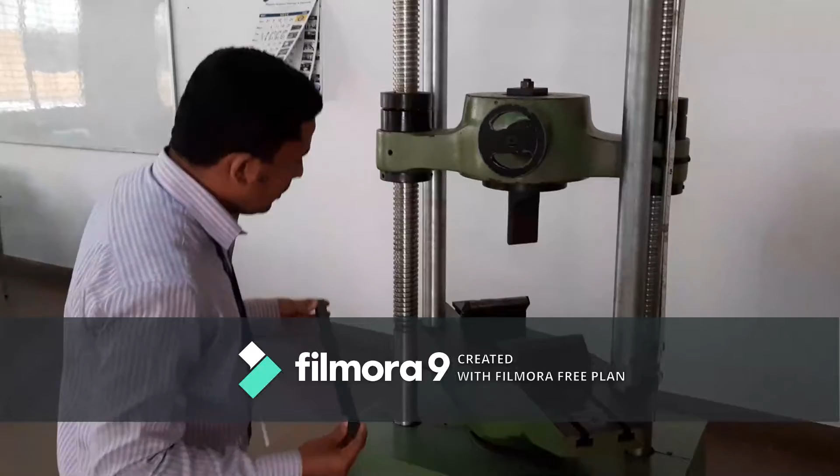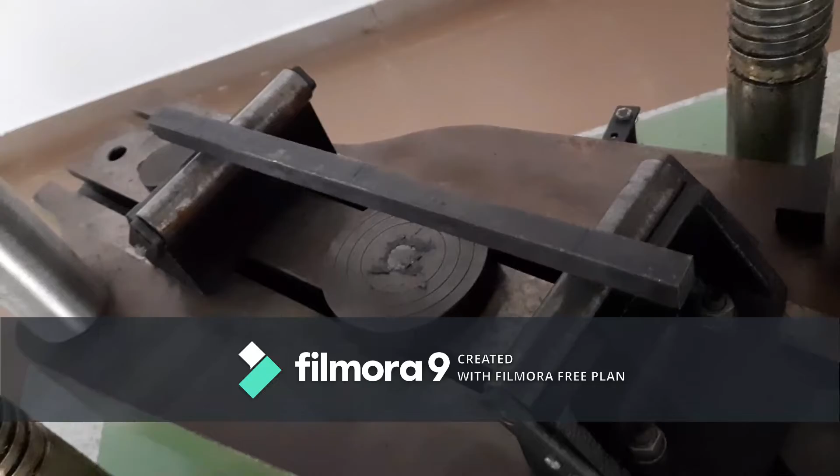Now we can copy those readings. Gauge length 300, and B is 20, D is also 20. Now let us start the experiment. Now we will keep the specimen on the two roller supports. We have two roller supports, and these extreme marks should be exactly on the rollers. Just make sure that it is exactly on the roller, and keep it exactly at the center.

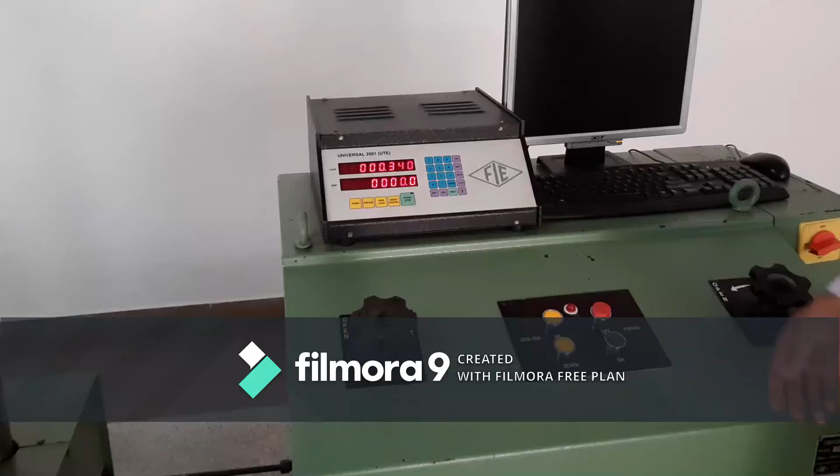Now after placing the specimen, you need to change the setup of the attachment for the bending. So this is the bending attachment for the cross head. You need to change this attachment and add this attachment for the bending. Next, before starting the experiment, you need to remove the dead weights. We have explained that in the previous experiments, so you can do the same procedure to remove the dead weights.

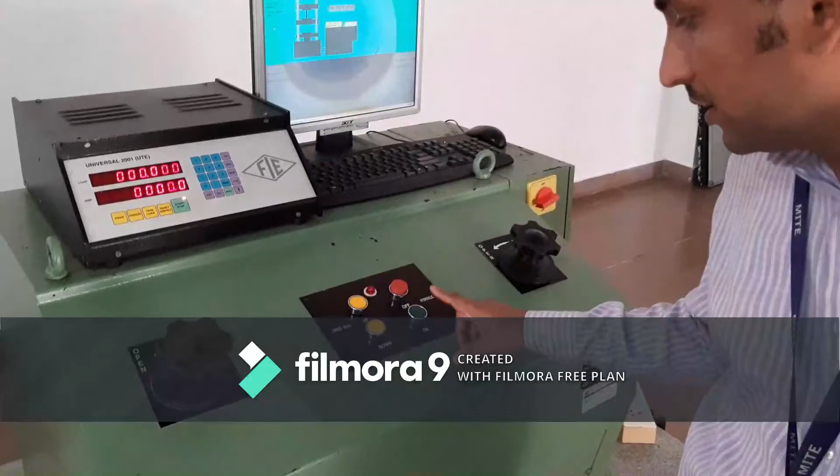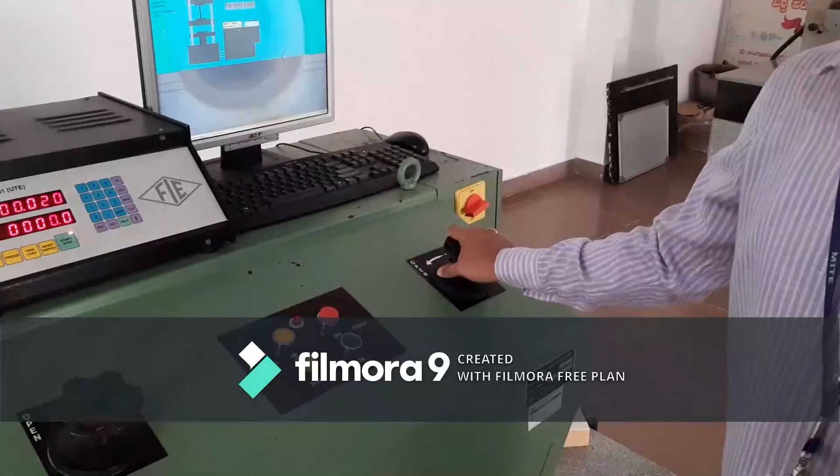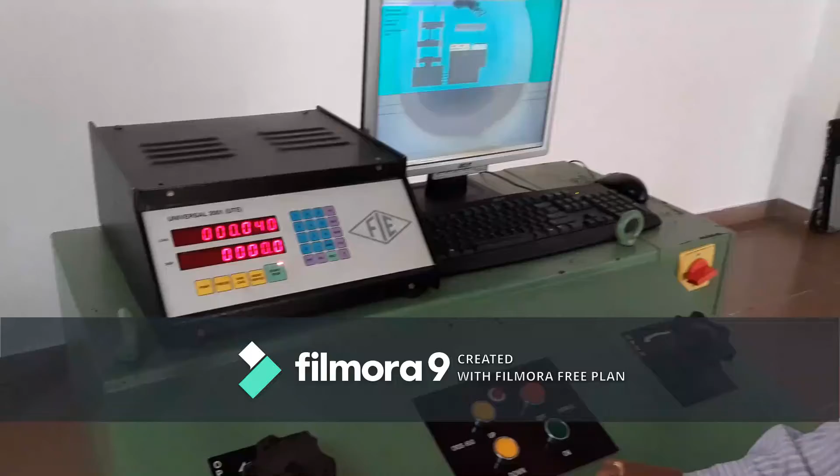Now you can move the cross head near to the specimen by using the up and down button. After moving it to the specimen, you can start applying the load by switching on the hydraulic button. Right now it is on, and slowly open this hydraulic knob to apply the load. You need to take a reading for every 0.5 kilonewton load, the displacement at 0.5 kilonewton, 1 kilonewton, 1.5 kilonewton, 2 kilonewton, like that for every 0.5 interval.

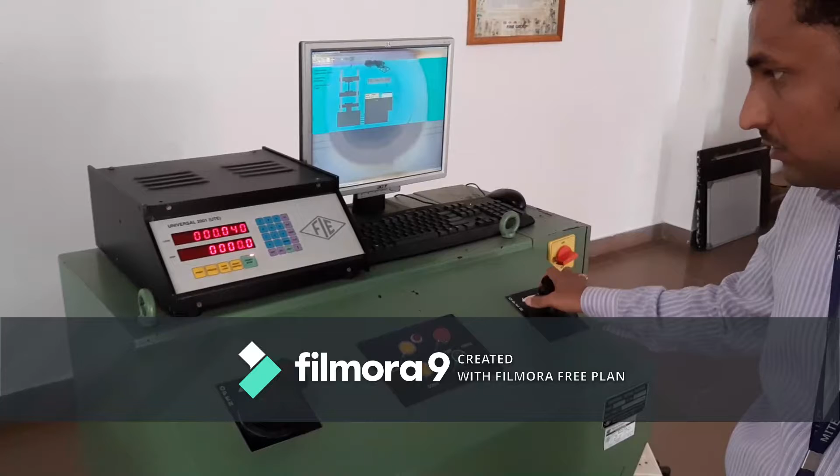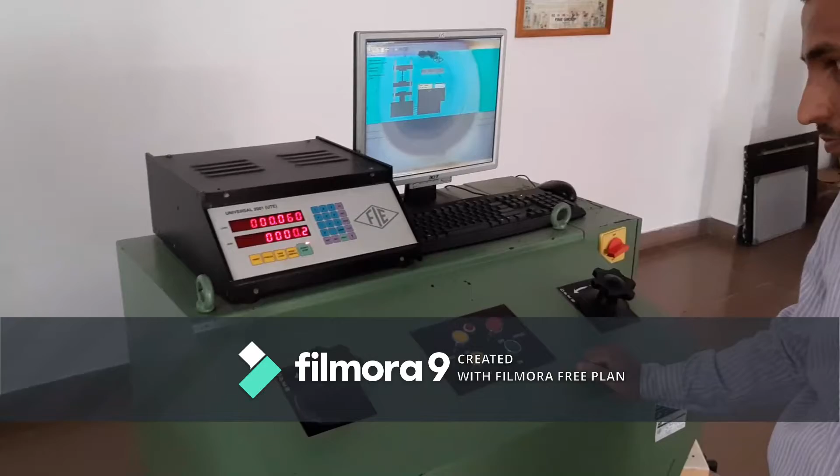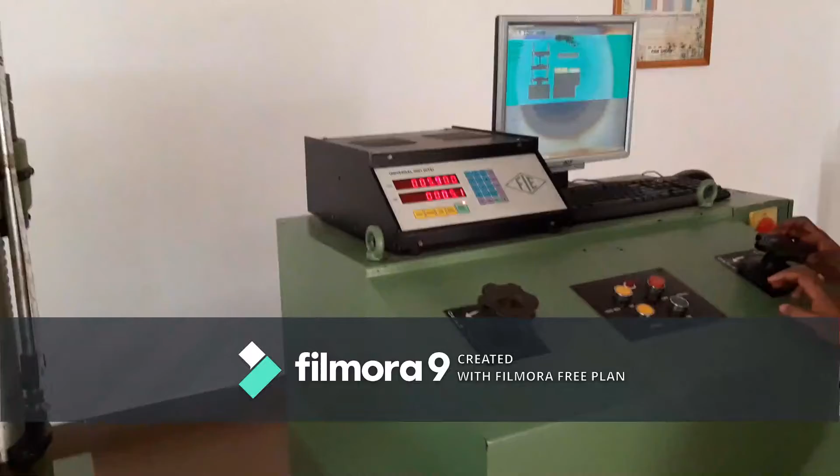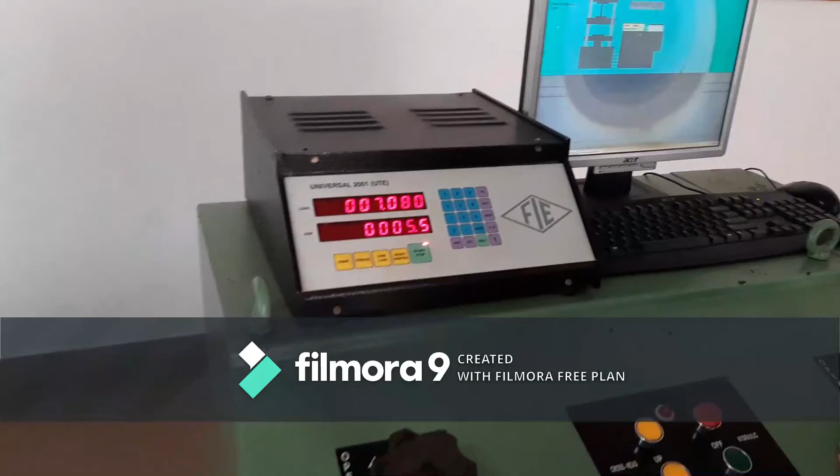Now I will release the valve to apply the load. Now the load is applying on the specimen. It is 4.8. Six, it is 5.2 displacement. 7, 5.5. For 7.5, it is 6 millimeter displacement.

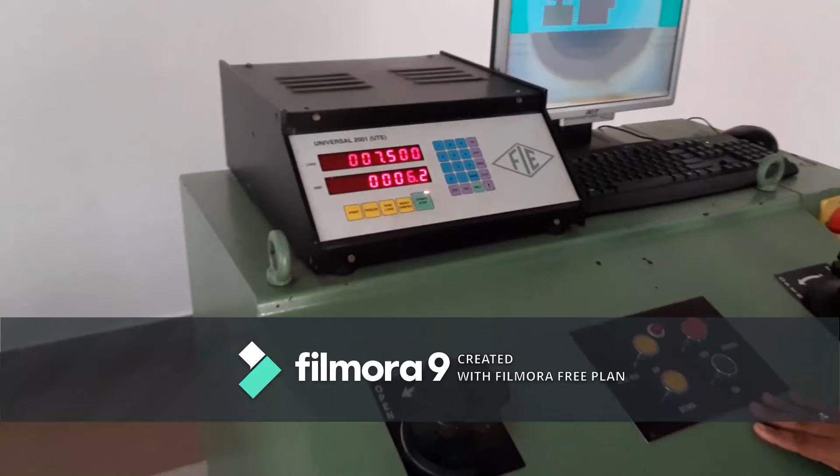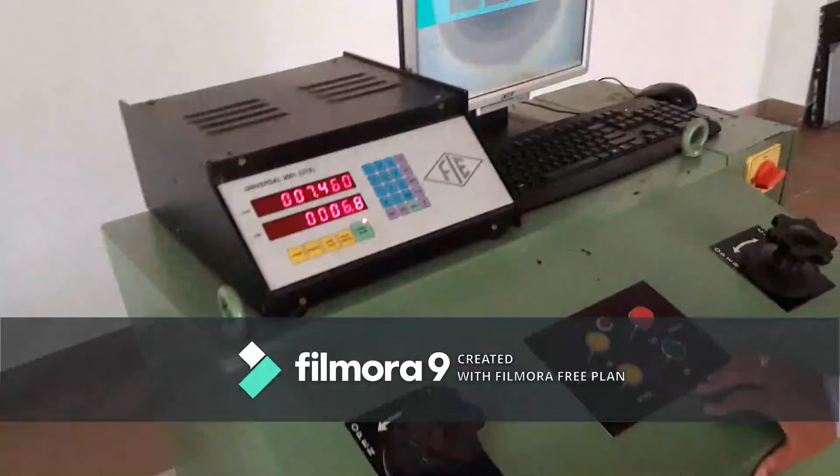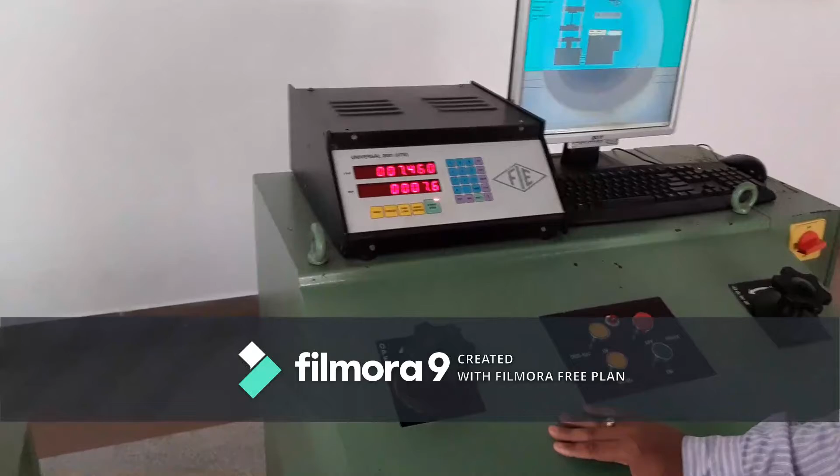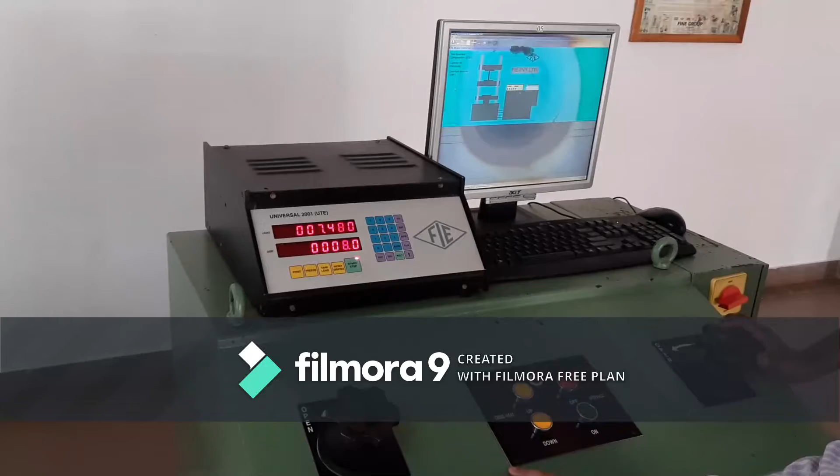Here you need to note down the yield point. The load will be dropped. You need to watch it carefully to get the reading for yield load. Now the load is dropped. Here it is 7.48 to 7.44. So 7.4 is the yield point. Now the load is increasing again. Yeah, 7.44 or 7.46 is the yield point. The corresponding displacement is 7.9. 7.5, it is 8.1.

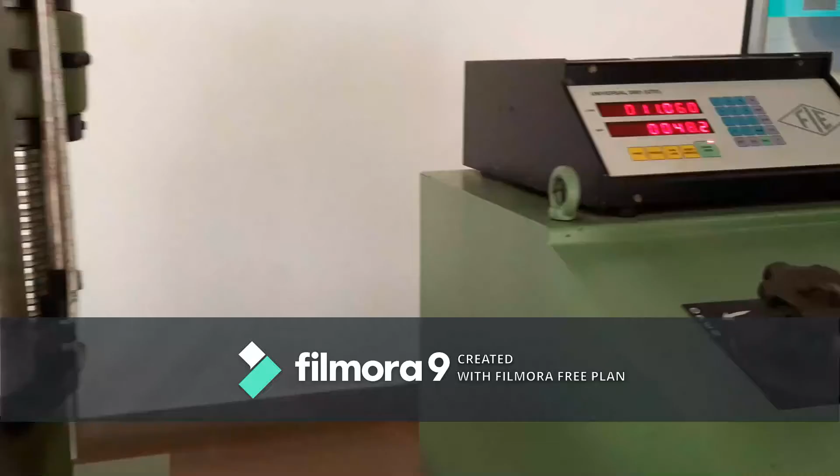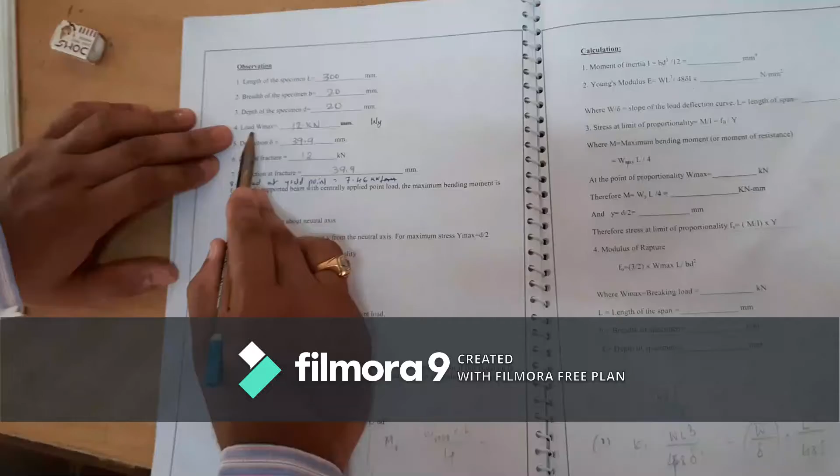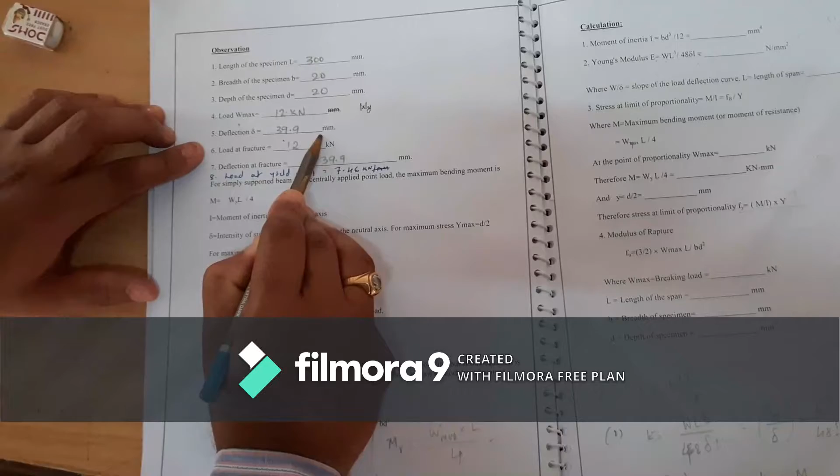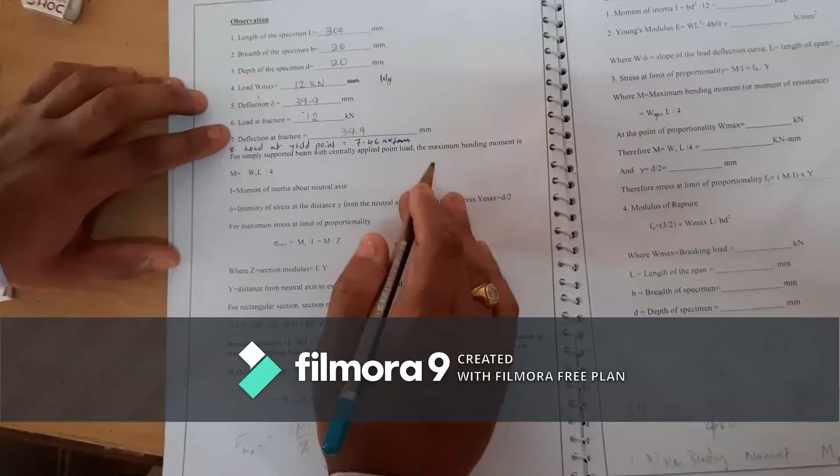Now the maximum load will go up to 12 kilonewton, not beyond that. At 12 kilonewton, we have noted the displacement as 39.9 millimeter. The load at fracture will be the same, because we are not going up to the fracture point, since a mild steel specimen will not undergo fracture. If it is a wooden specimen, it will go to fracture point. So the fracture point will be the same, 12 kilonewton, and the deflection at fracture point is 39.9 millimeter.

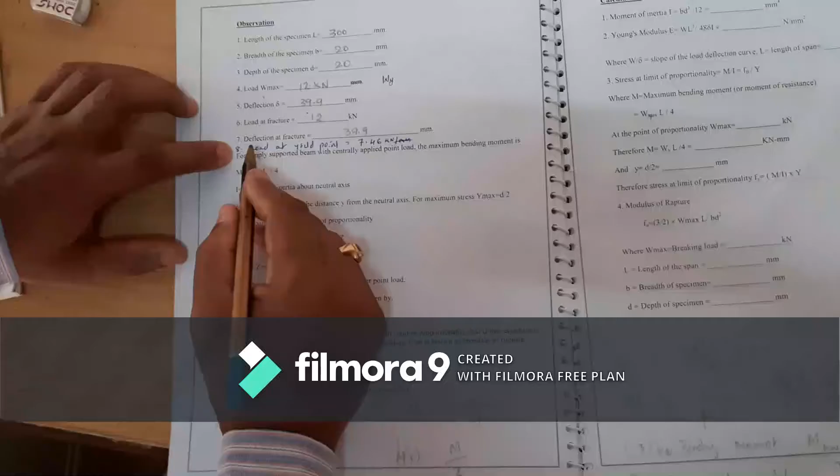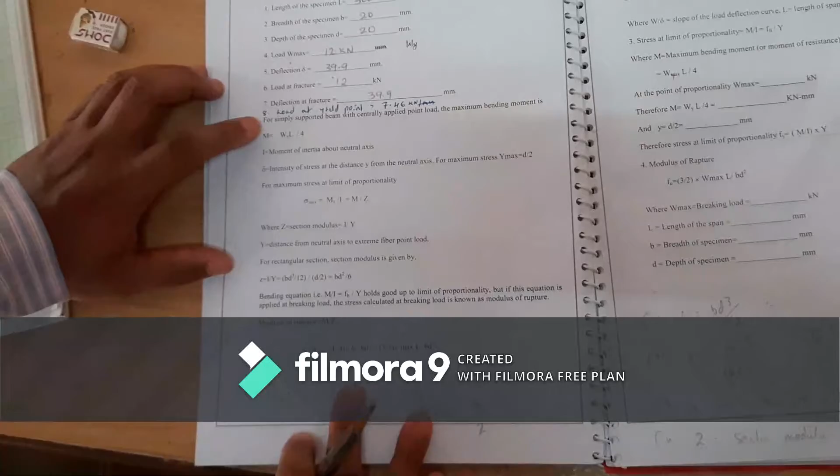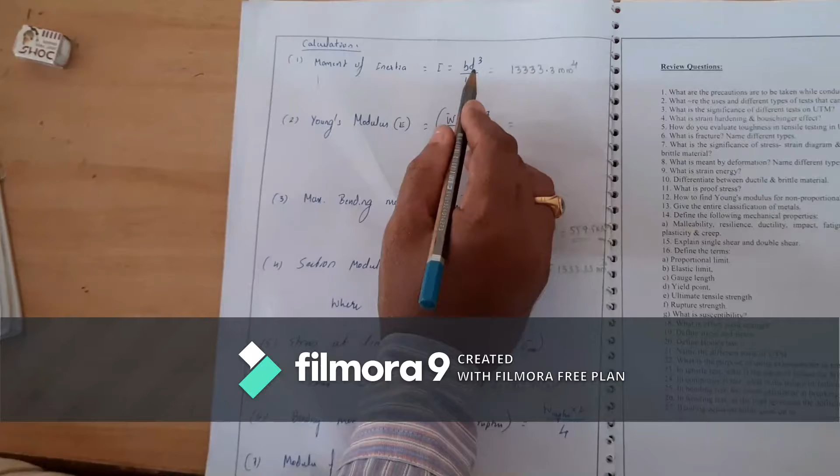The next point is very important, the load at yield point, that we have noted as 7.46 kilonewton. After taking the observations, now we can go for the calculation. First we need to find out the moment of inertia, I equals BD cube by 12, where B is the breadth and D is the depth. So the answer will be 13333.3 millimeter power 4.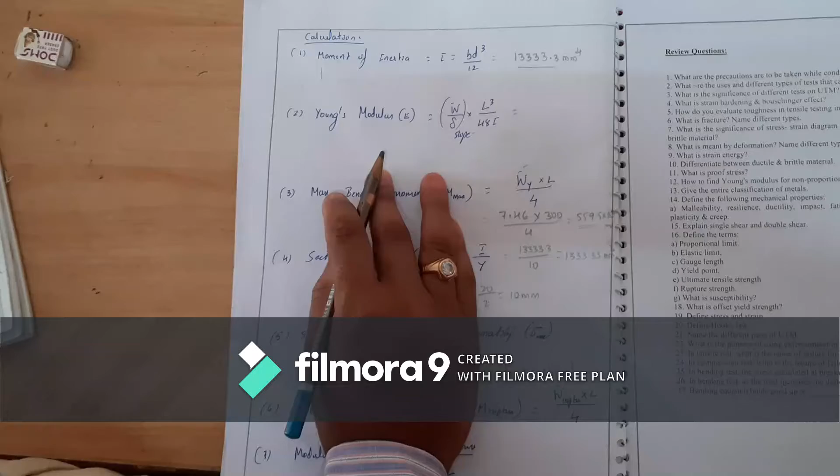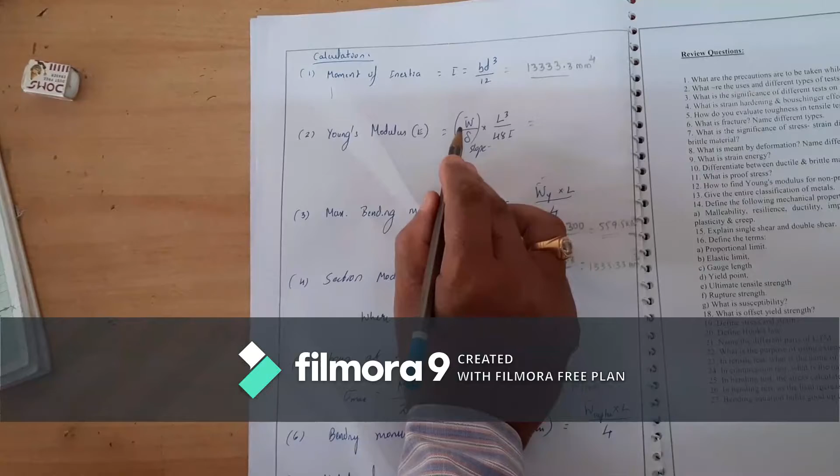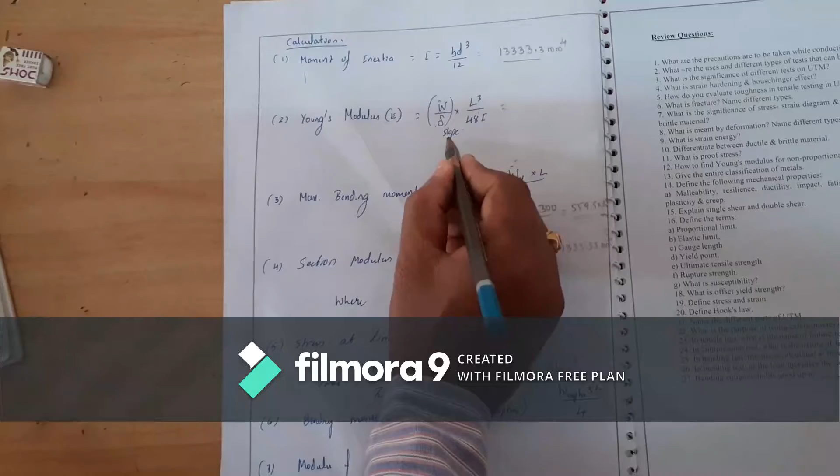Next is the Young's modulus. To find out the Young's modulus, we have an equation W by delta, that is the slope from the graph of load versus deflection, into L cube, the gauge length, divided by 48I, where I is the moment of inertia. Now we need to find out the slope. Draw the graph; we have already drawn it here from the tabular column, load versus deflection, W versus delta.

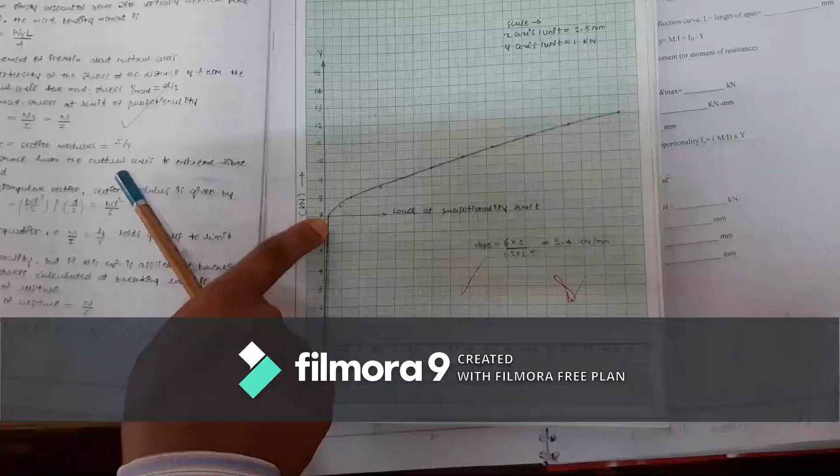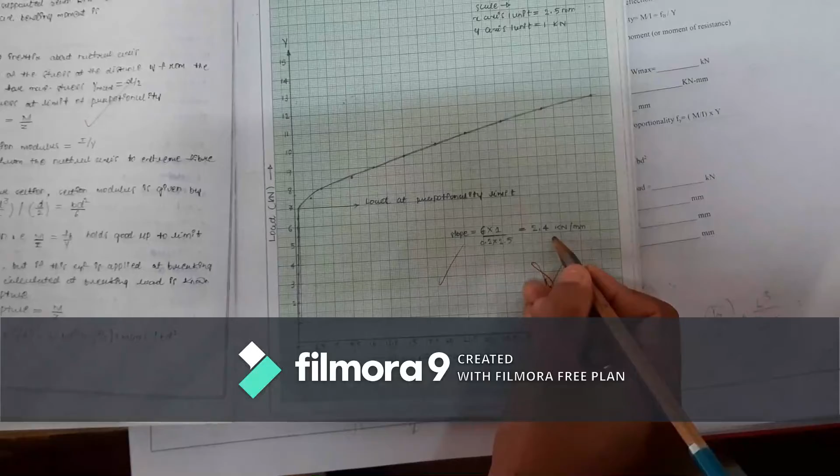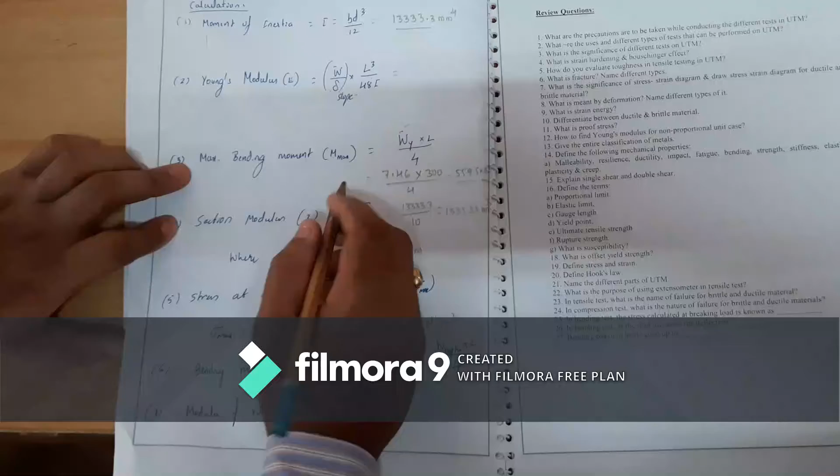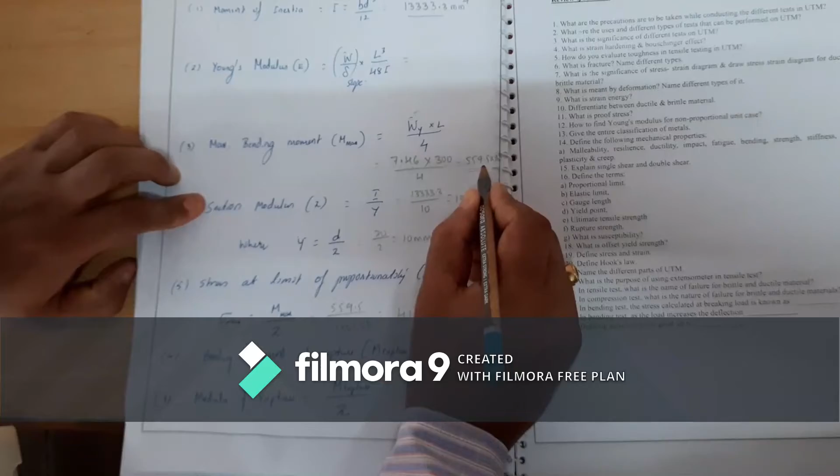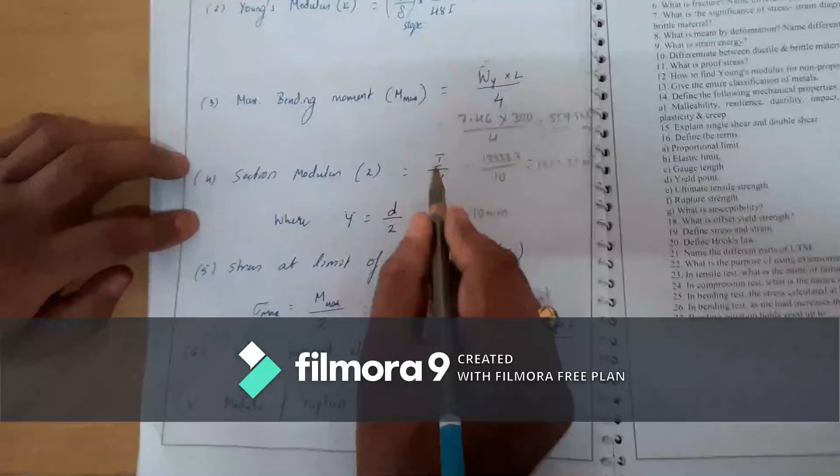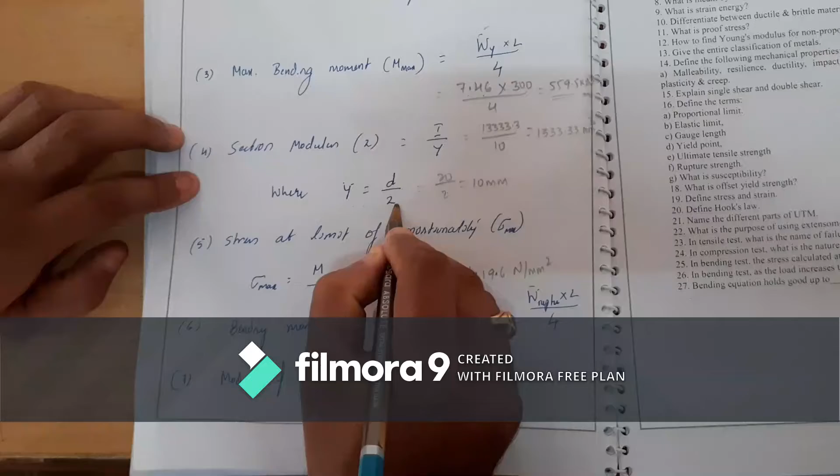Next is the maximum bending moment. The formula is Wy, the load at yield point, into L divided by 4. That is 7.46 kilonewton into 300 divided by 4, which is 559.5 kilonewton millimeter. Next is the section modulus, Z. It is equal to I by Y, where I is the moment of inertia, 13333.3, and Y is D by 2, depth by 2, that is 20 divided by 2, 10 millimeter. Substituting, the answer will be 1333.33 millimeter cube.

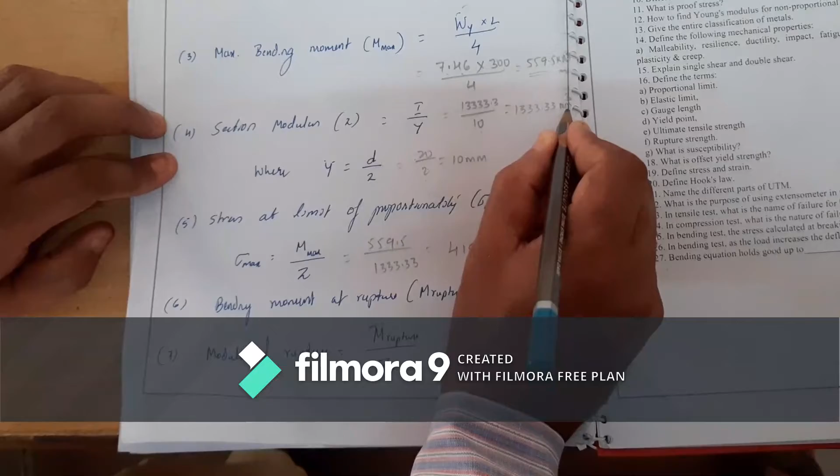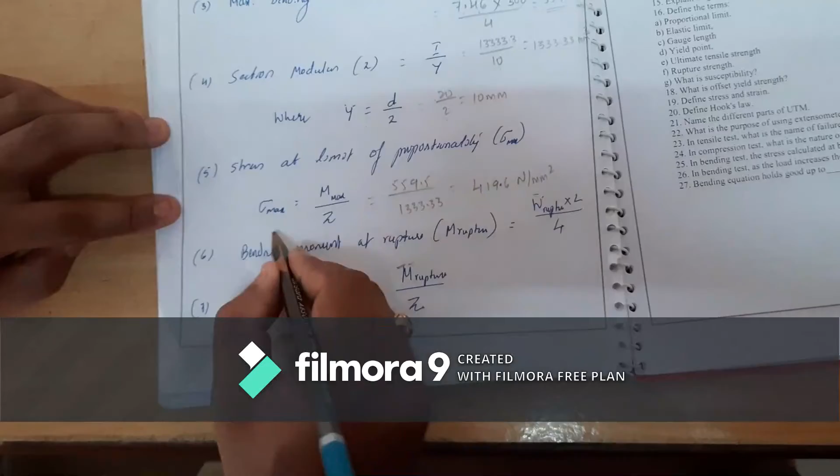Next is the stress at limit of proportionality, also called the maximum stress at limit of proportionality. Sigma max is equal to the maximum bending moment, the bending moment at yield point, divided by Z. Bending moment is 559.5 kilonewton millimeter divided by Z, 1333.3. So we'll get the answer 419.6 Newton per millimeter square.

Next is the bending moment at rupture point. Rupture point is nothing but the fracture point, which we have assumed as 12 kilonewton. The formula is W, the load at rupture, into L divided by 4. Substitute W rupture as 12 kilonewton into L 300 divided by 4. That is the bending moment at rupture.

Now modulus of rupture is equal to bending moment at rupture divided by Z. The bending moment at rupture comes from the previous equation, and Z is 1333.33 millimeter cube. Substitute it and we'll get the answer for modulus of rupture. So we have Young's modulus, maximum bending moment, section modulus, stress at limit of proportionality, bending moment at rupture, and modulus of rupture. Thank you.